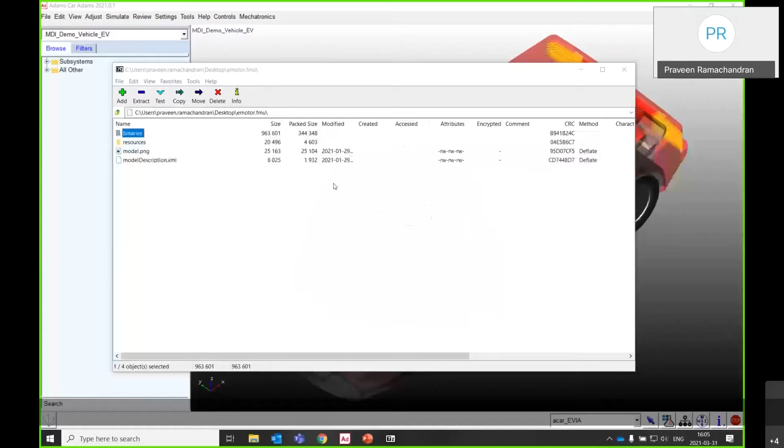My name is Praveen, and together with my colleague Alexis, we're going to take the first session of today's webinar. So we start with the introduction. I think the past couple of years, those of us who work with the automotive business hear a lot about electrification. A lot of new exciting car models have been released by our big automotive OEMs across the globe. People who have driven one of them know that it's really exciting to drive an electric vehicle, mainly because of its enthralling acceleration and the stability it gives because of its lower CG.

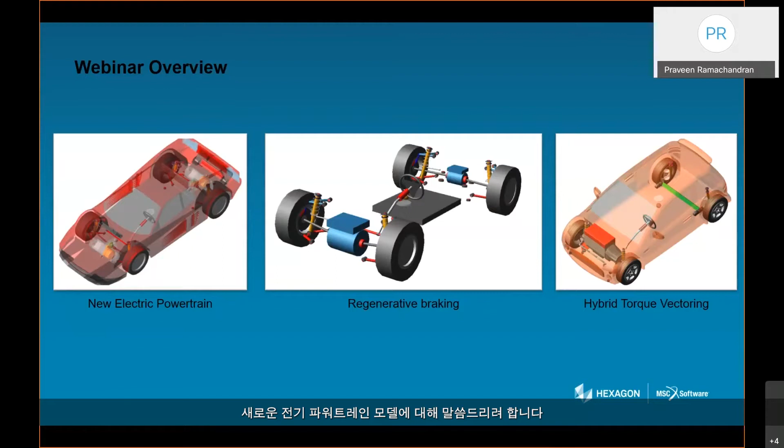Many of our customers are driving the electric revolution, and we decided to work on it, and we came up with a few examples that will be helpful in your day-to-day work. This is an overview. My colleagues, Manuel and Kent, will speak about some of the application side. But in the first session, we will speak about the new electric powertrain models which we designed in Adams, and in this session, my colleague and I will be taking over.

Hopefully you are all familiar with this first model, the typical Adams example assembly model. It uses an IC engine. The first question is, how do you convert this IC engine Adams model into an EV model? And the next question was about the EV model. When you convert it from an IC engine to an EV model, there can be many sources of power.

In an IC engine, there used to be one engine in the front, and then maybe you have four-wheel drive. You transfer the power using drive shafts to the four wheels, but you never have two engines. But in case of an electric motor, you can have two different motors, in the front and the rear. You can have four motors, like in a hub-wheel driven car, or it could be like a truck with many motors. So how to address it?

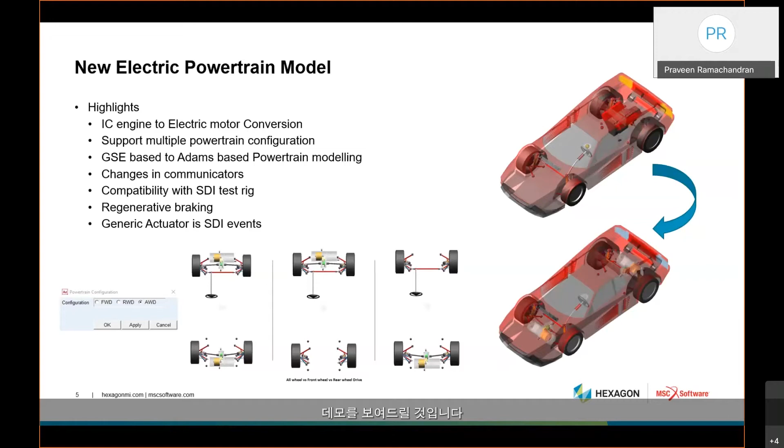Then we also will highlight how we converted from the traditional equation-based, the GSE-based powertrain modeling to a more Adams-based powertrain modeling. And we'll also highlight some of the changes we brought in the template, especially related to the communicators and the compatibility with the SDI test rig and so on. And then my colleague, Alexis, will speak a little bit about regenerative braking, and he will show how this can be demonstrated. So I will start directly with the demo.

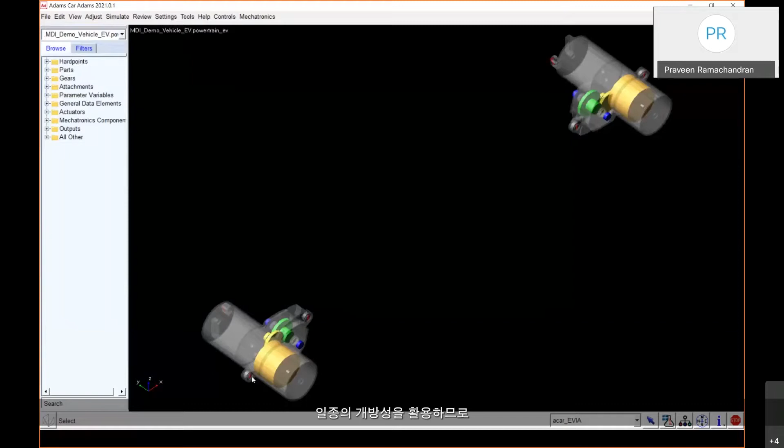So let's see. Yeah. So now you can see the familiar Adams assembly model. And what we are interested in is the EV powertrain. As you can see, there are two motors in the model. One drives the front and one drives the rear. And the first thing we are going to look at is the topology. Unlike the traditional GSE-based model, here everything is modeled using Adams components, which gives a kind of openness and makes it easier for our users to modify it.

So if we look at the front part, we have a housing which is attached to the subframe using bushings, which are like the engine mounts. We have a rotor part which represents the rotational mass and inertia. We have a two-stage gear reduction. You have the intermediate shaft and then the differential, which will be used to transfer the torque from the motor to the drive shaft, which is attached here on this side. And we are using couplers for gear reduction. So this is actually a really simple mechanical system.

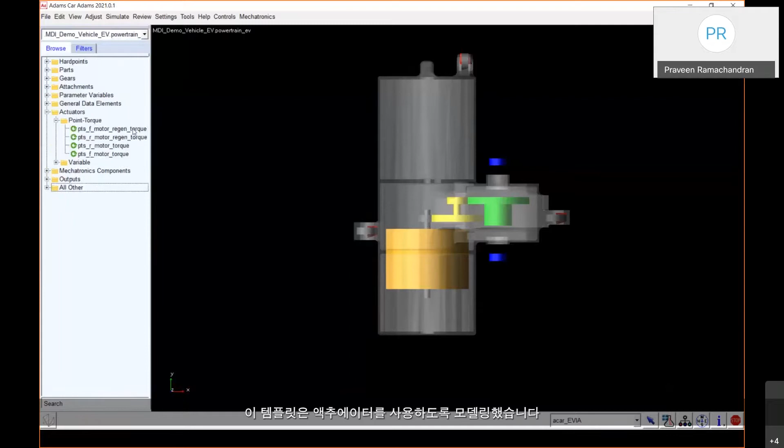What we have modeled in this template is that we are using actuators. The actuators act between the rotor part and the stator part. And we have two actuators, one representing the driving torque and the other one representing the regen torque. The driving torque and the regen torque are controlled using splines. So if you go here to the splines, you can see the splines used for these actuators.

The driving torque is a function of the throttle demand and the RPM, and the regen torque a function of brake demand and RPM. There could be other ways to model regen torque, which my colleagues Alexis and Manuel will explain. But in this simple case, it's just based on brake demand.

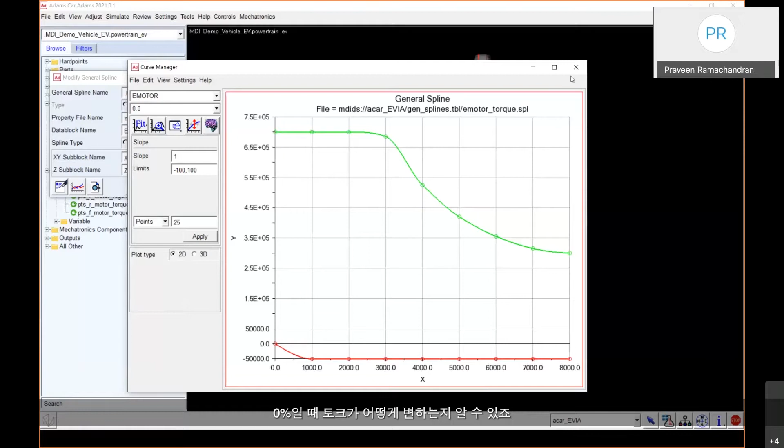So if we open one of the examples for the driving torque spline, you can see that this is really familiar. It's similar to an IC engine, but you can see how the torque varies across RPM for different values of throttle. When you have 100% throttle, how does the torque vary? And when you have 0%, how does the torque vary? So this is actually a really simple way of using splines to model an electric motor. We also have some variables called scale factors that can be used to scale up and down the amount of torque applied to the motor. So this is the first set of information.

Now, one of the interesting questions which our users used to have is how do we support this multiple powertrain configuration? Let's say right now it's an all-wheel drive system. If we want to convert this into a front-wheel driven car, how do we do it?

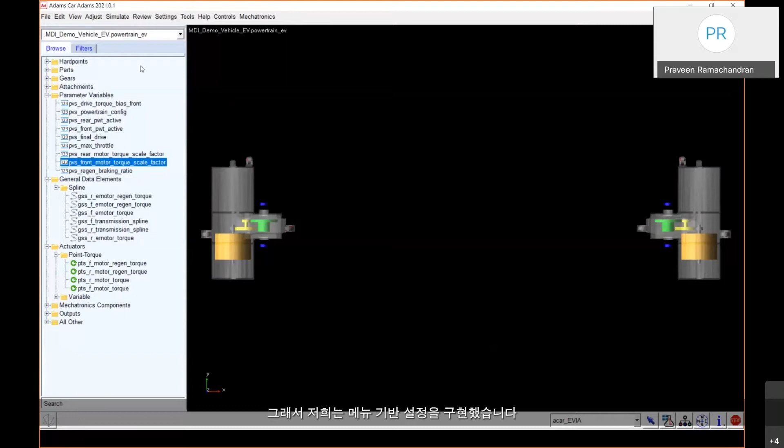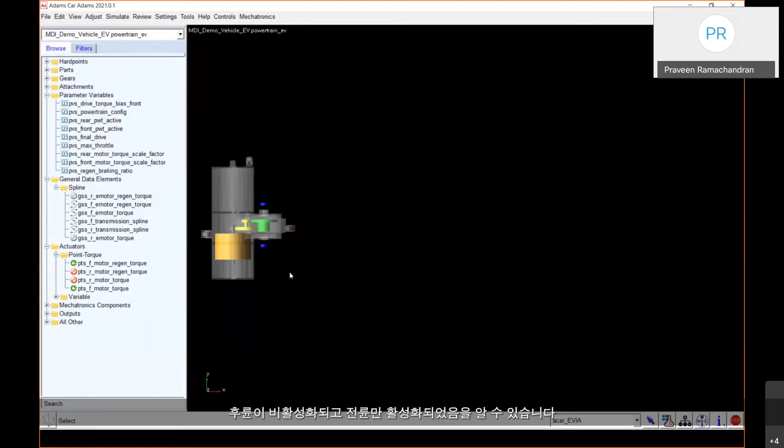So what we have done is we have implemented a menu-based setup for it. We go to the adjust menu, we go to powertrain configure, and when we change from all-wheel drive to front-wheel drive, we can see that the rear part is disabled and only the front part is active. So you can actually change your configuration from the standard interface.

So of course you can ask a question: is it just disabling and enabling the groups? Is that all? I would say no, because what is also changed with the help of this menu or the macro is that there are some communicators which communicate the properties of the powertrain to the SDI test rig, the standard driver interface test rig. So we are also changing these state variables in the background. So this is just for your information.

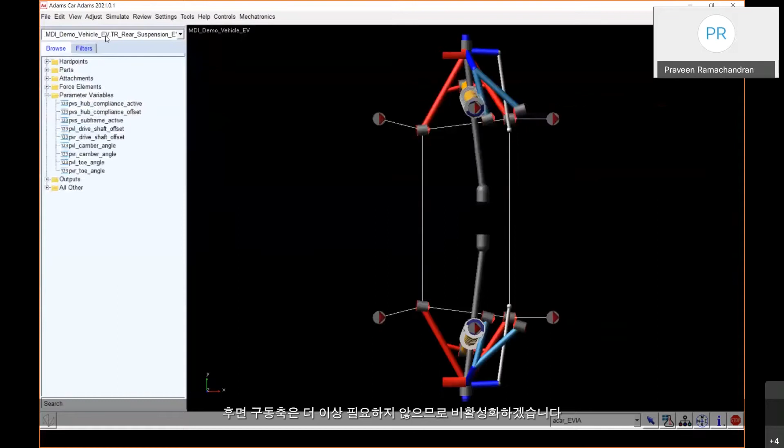So now we have a front wheel driven car, and as you can see, we don't need the rear drive shaft anymore. So let's disable that one as well. Let's go to driveline activity, inactive, and it's gone. Then we come here, and here we can do a standard acceleration analysis. So it's a front wheel driven.

You can see, we can do a closed loop throttle. So then you can do an acceleration analysis. I will not go through the analysis itself, but I will directly go to the results just to save some time.

So here is a short summary of what we explained. We have the torque, we have scale factors, we have the spline-based model, and the macro makes changes to the state variable. And you can see some of the results from it. Here we have a closed loop acceleration event with the EV model. The user wants to have around 0.5 G of acceleration from 1 second. You can see that it is doing that, and the speed of the vehicle is increasing accordingly.

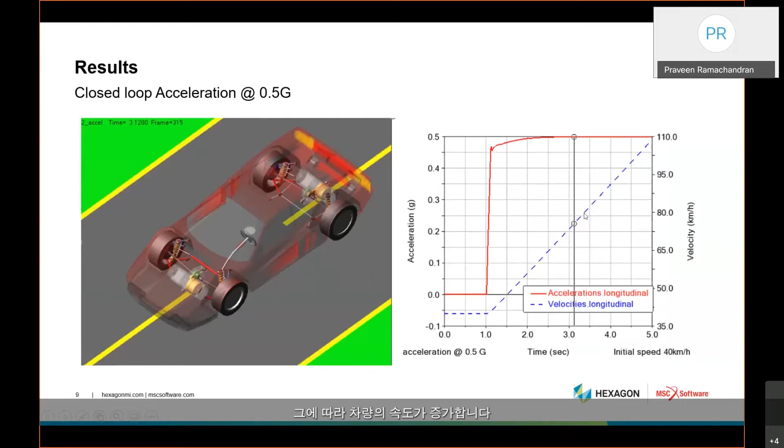This is an example where we compare acceleration for a front wheel driven versus rear wheel driven vehicle. The throttle demand is the same for both cases, but a rear wheel driven vehicle, as you can see in this picture, got better acceleration, resulting in a higher velocity because of the weight transfer to the rear. If you look at the drive wheels, for a rear wheel drive the normal force on the drive wheel is higher compared to a front wheel driven vehicle.

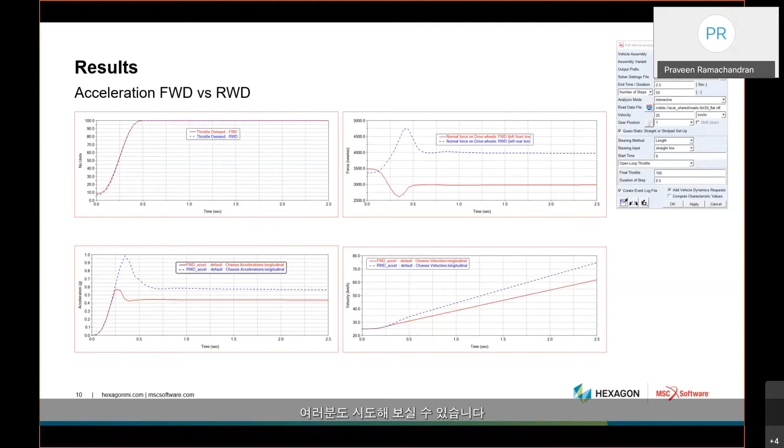So these are some of the kinds of simulations that you can do. This is compatible with most of the Adams standard analyses, and you can try this out. And of course, you can ask a question: you have created a macro, so do we need to add any additional setup file? Or if I decide to transfer this file to my colleague, do I need to send something more?

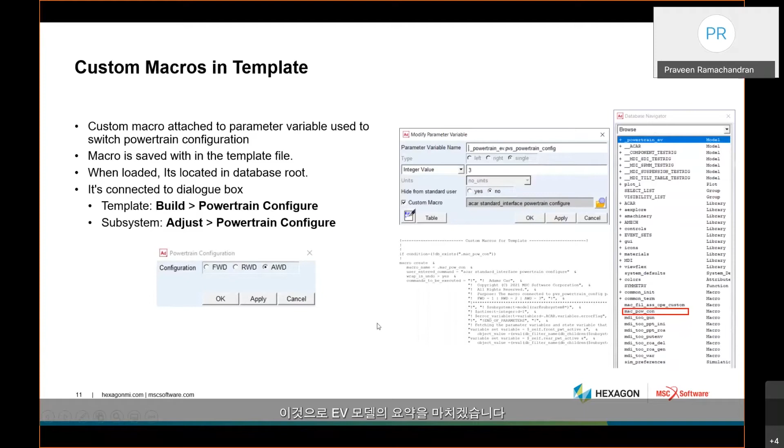Actually not. That's a good feature inside Adams, called the template macro. This macro is saved inside the template, and as you can see in this image, a screenshot from the template file itself, the macro is saved here inside the template, so you don't have to send any additional file. So it's very easy to use. If you're interested to see the macro, you can see it under the database navigator under macro mac_pow_con. So this is a short summary of the EV models.

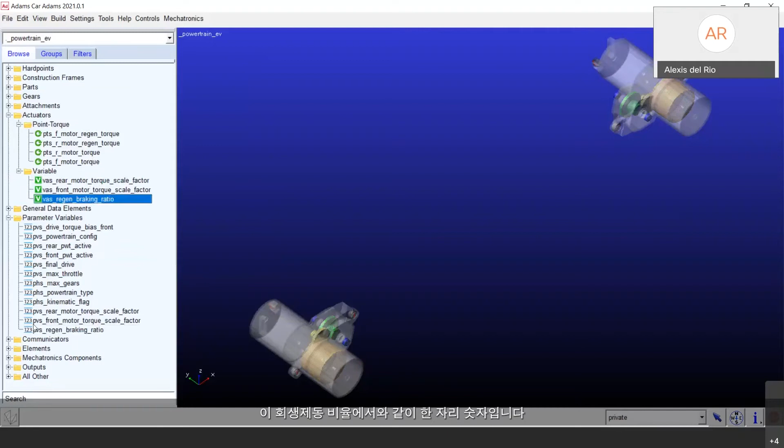But maybe if I show you the template, you will see it in a better way. The point torques, as explained, apply the torque to the vehicle. The variables collect the value of the parameter variable here, like this regenerative braking ratio, and it's a single figure. Then you also have your state variables, which give all the characteristics to the vehicle required to work. I could have set these actuator variables inside the system elements, but then they would not be tunable during the simulation. And that's the intention in this example.

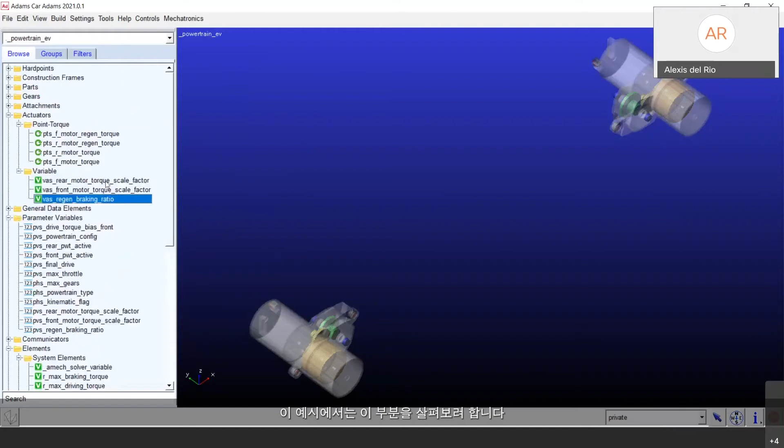We wanted to show you that you can do this, and the way to demonstrate is going back to the standard interface. There's two ways to run this. You could do a full vehicle analysis and do a file-driven event.

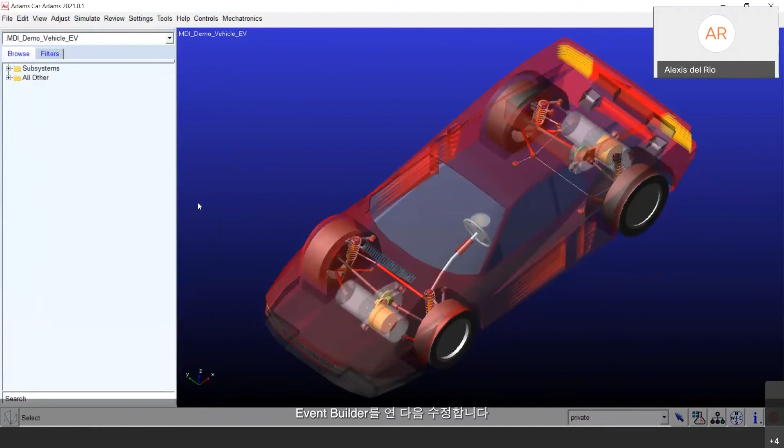And through here, you could press this button to open the event builder and then modify, or you could do it the other way around, going through event builder. You will have to set either a new or open an existing XML file, which will have all the characteristics of the vehicle. Once you are in the bottom side, in the actuators, you can generate one to make sure that your vehicle performs the variation.

So we can call it a braking regen. Then we add it, and from here you click in actuator, and you will have all the different actuator variables existing in this assembly.

So in this case, we can get into regen braking ratio, and then create expression. Create expressions such as a STEP5 of time, which will be simple enough to follow, and then say at time 1, my value is 1, and at 5 seconds, I want it to go either to 0.5, or I want it to disappear completely and switch it off.

Then from here, it's just a question of saving, and then saving and use. What you will come up with is, again, you will go into the file-driven event menu, with the exception that here you will have the XML pointing to the one that we did in the event builder, and then you go from there.

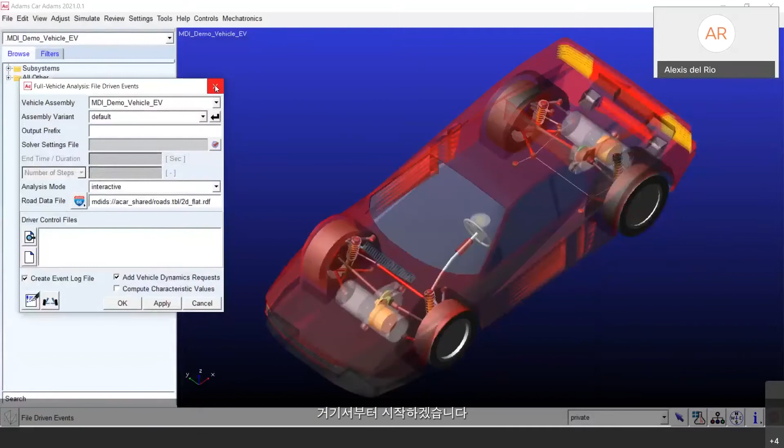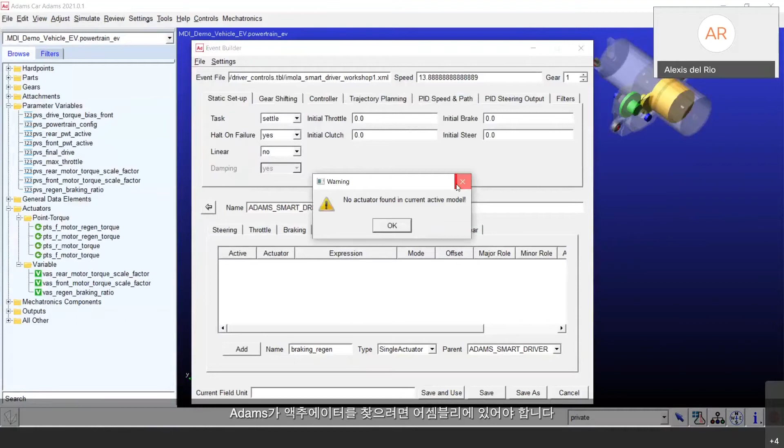Something to bear in mind, and this is important because it's a bit confusing. If I were to select the powertrain and then go into event builder and create this actuator, it will give me this warning. This only tells me that I need to be careful, and for Adams to really find out the list of actuators, I need to be in the assembly.

Another important thing to point out is that when you apply the actuation and the step 5 function as we've shown, the value in the variable, which is actually this parameter value, will be overwritten. So anything you have there will be gone during the simulation and will be applied according to what you have defined. That's something you need to be aware of, good to know upfront.

And that's everything from my side. Thank you.

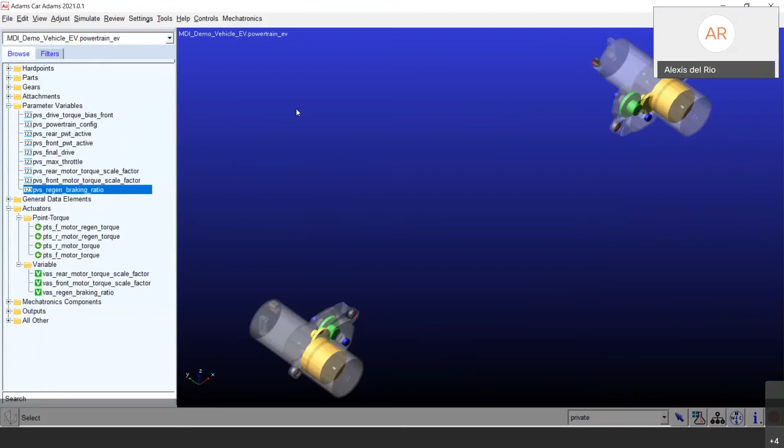All right, thanks, Alexis. So our next presenter is going to be Manuel Shen. Manuel, I'm going to pass you the ball. Hey, Hemant, sorry, Praveen, yes. I have, maybe I can present one more demo. Oh yeah, sure, go ahead. Sorry about that. Okay, could you please make me the presenter? Yeah, I can. Yeah, thank you. Give me just a second, Praveen. Yep. So I pass the presenter privileges to you, Praveen. Yeah, thanks, thank you, yeah.

Okay, so I will share one more demo model, and then I will let Manuel present the regenerative braking. So this demo is about integrating control system to an Adams model. Here in this example, we have a control system model for the electric motor as an FMU, and we are going to explore how to integrate this to an Adams model.

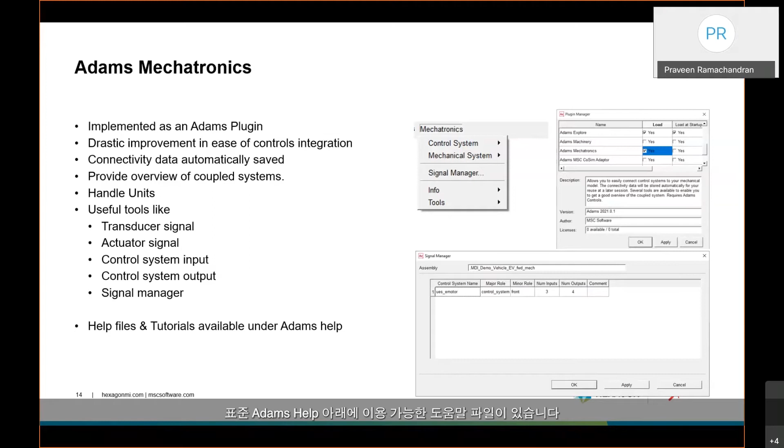It can provide you an overview of the coupled system, for example, the e-motor, what are the connections, that's displayed easily. One of my favorite things is that it can handle units. So if it's a torque, whether it's a conversion from Newton meter to Newton millimeters, Adams mechatronics can handle it. It has tools like transducer signals, actuators, control system input and output that help do these operations. If you're interested to learn more about Adams mechatronics, there is a help file available under Adams help, standard Adams help, so please take a look at it.

The second technical term I used is the word FMI, Functional Mockup Interface Standard. It's nothing but a common standard to exchange data. It is supported by 150 plus tools. You can find these details on the website FMI. So it's basically a common way of sharing data between different softwares.

And of course, Adams supports it. We decided to use FMI for this particular example because we want our workflows to be independent of control software. So you could use MATLAB Simulink or Easy5 or any other software, but if your software supports FMI, this workflow would be directly applicable to your case.

One final point about FMI is the licensing. Do I need an additional license to run an FMU? That is actually set by the vendors. For example, if you are using an FMU generated from Simulink, it's actually MATLAB who decides if you need a license or not. In case of our tools, if you use an Easy5 co-simulation FMU, you don't need any additional license, it's included in the FMU. But if you are using an Adams FMU, then you need a license. So it's different across different vendors, and it's your choice.

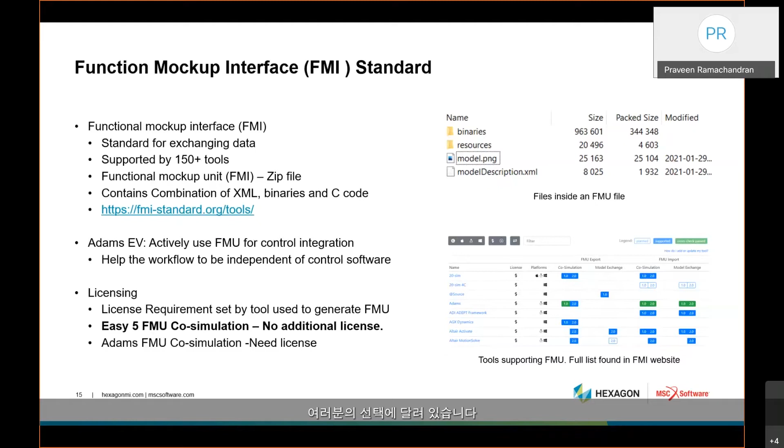Now coming to the flow chart. What we are planning to do is we have an FMU model of the electric motor, and we would like to integrate it with our existing powertrain template. In our powertrain template, we have a front motor and a rear motor, and we have to find out the correct value of the torque. For example, what is the driving torque that is going to be applied by this e-motor, and that is calculated by the FMU, which is on the right side.

So what we are going to do is first create a template where we integrate the FMU inside an Adams template as a control system. Then we will import this template into an existing assembly. When we import it, this powertrain EV template will take the value from this e-motor controls subsystem. A little bit complicated when I explain it, but maybe I can show you in a demo how this could be done.

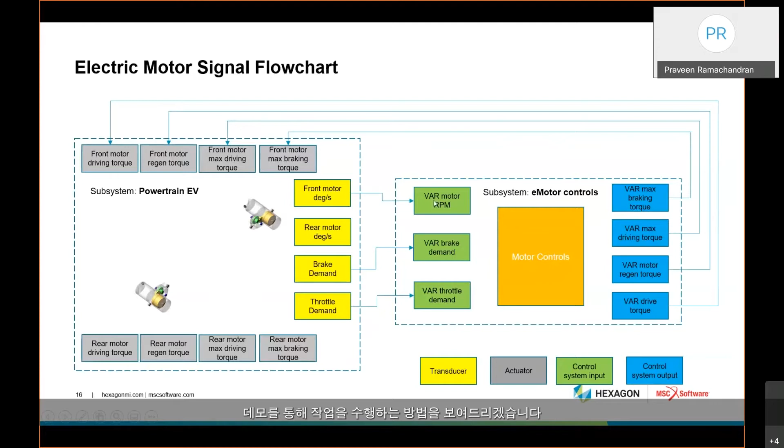So we go to the assembly here. This is a standard Adams assembly, an EV template. It's a four wheel driven car, and what I have as a user in my hand is an FMU. So what I have is a file which looks like this, an e-motor FMU. If you open this file, you will find some files like model description, some binary files - a DLL file for the Windows version and an SO file for the Linux version. This is the file that I received maybe from the control system engineer.

What I do as a first step is go to the template builder, and I will integrate this FMU as a control system. For this webinar, for sake of time, I'm not going to explain how to do this, but you can watch it in the online training materials.

So what we have done is integrated this FMU in a separate template, called e-motor controls. Then you can see the corresponding inputs and outputs: there is the input signal, throttle demand, brake demand, and motor RPM. The outputs are the torque values - the driving torque and regen torque, which is used by the actuators. Then there is the max driving torque and max braking torque, which is used by the SDI test rig. So this is how it looks like.

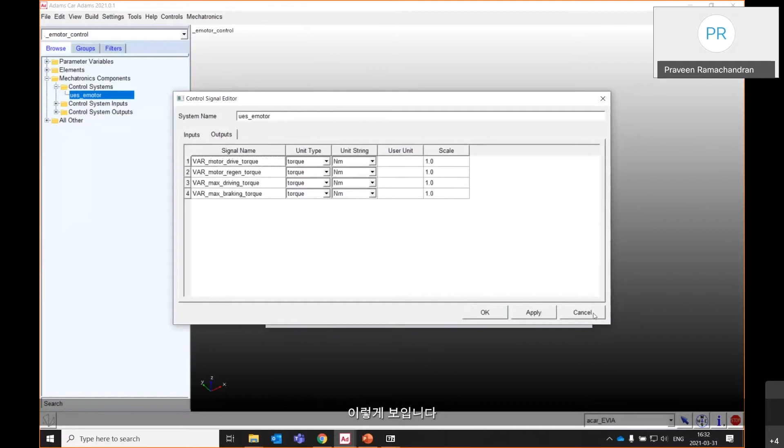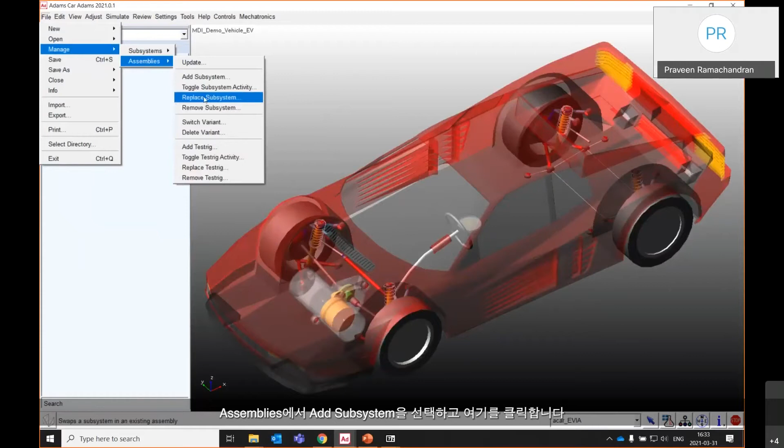Now what I do is go back to the assembly, and here in this model right now it is based on the spline. What we will do is import this new e-motor controls subsystem into this assembly. We go to assemblies and say add subsystem, and click here. We add e-motor controls. So now this particular control subsystem is part of the assembly. Due to the way the assembly is modeled, now the motor will take the value from the FMU instead of the spline. So now this model is controlled by the FMU.

You can actually see or get a visual picture of how these controls are connected. If you go to the mechatronics plugin and click on the signal manager, press OK, you can see the control system present here, and how the connections are done. If you look at the input channel, you can see the throttle demand is connected to the throttle demand, brake to the brake, and so on. If you go to the output, you can see there are some output ports, but it's not connected. I'll show you how to connect it, and you can see how easy it is. There is something called motor drive torque.

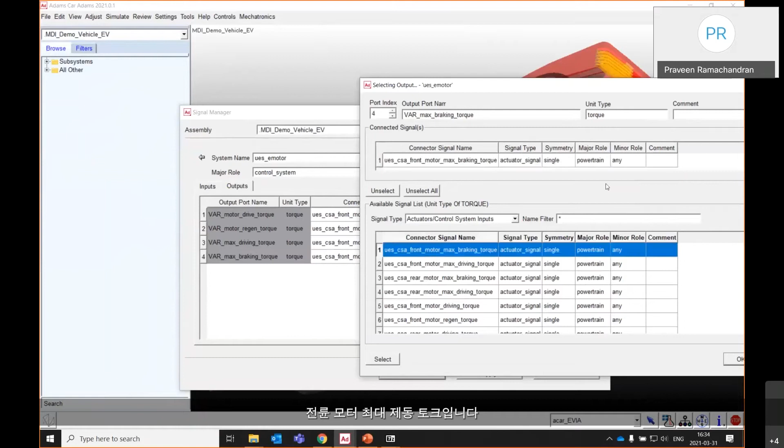So you double click here, and since we are only working with front wheel drive, you can select front motor driving torque. This is selected. Next one is motor regen torque, so it's front motor regen torque. Max driving torque should be front motor max driving torque. Front motor max braking torque. So you can double click and do the connections, and you can see the output channels are connected to the right signals. Then you press OK.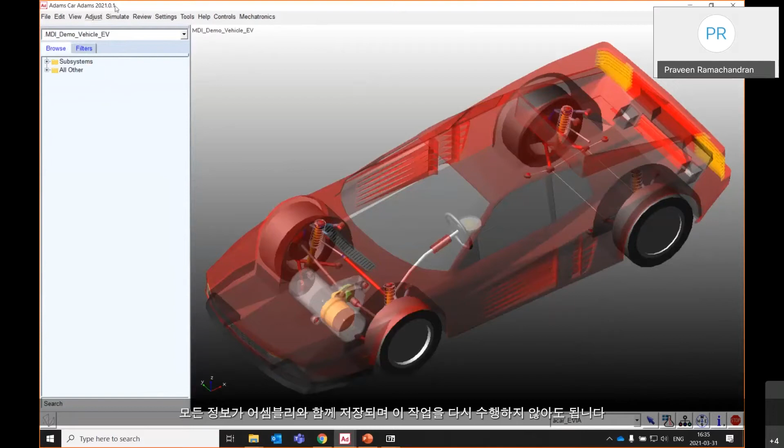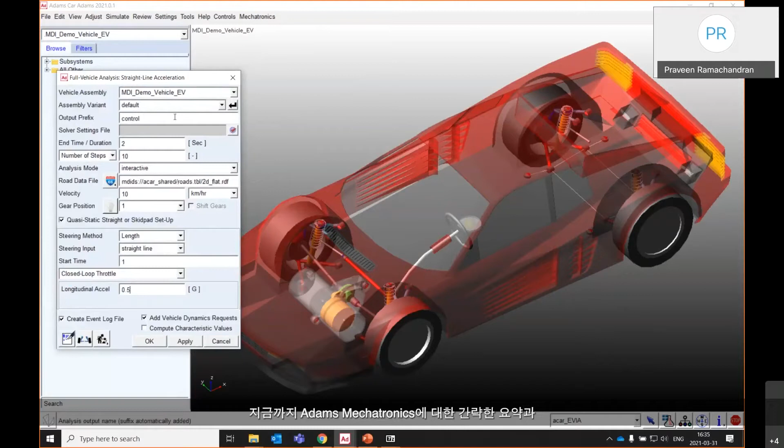All the information, all the signal connections are done. When you save this assembly, all this information is saved with the assembly, and you don't have to redo this. What you can do is directly go to the standard events, let's say an acceleration event similarly, and you can just perform this event without much work, just like the previous one. So you press this, and then you get the result. That's a short summary regarding Adams mechatronics and integrating a mechatronics model into it.

One of the things I liked about this system is how mechatronics handles the control system. What is good is that it saves all the necessary files for the control system within the database. This is the database, and it saves it under external system libraries. Here you can find the FMU, the ESL file, and all the necessary files. So it's actually quite a neat way of integrating the control system as well. That's a short summary of integrating the control system. I hope you try this out, and hopefully it will make your life easier.

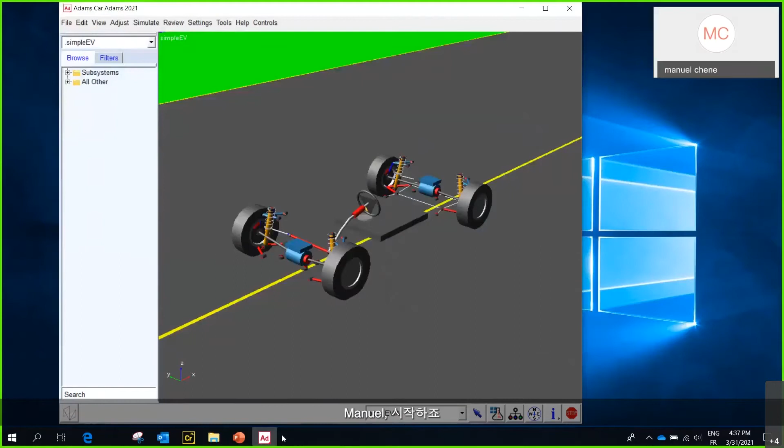Yeah, okay. You should be able to, yep, so I see your screen. Yep, looks good, Manuel. Okay, this one.

Okay, so I'm presenting now the regenerative braking scenario you will find in the workshop, in the asset. This scenario is using three EASY5 control systems working together and communicating some kind of information. I will explain how this is working, how the three systems are working together.

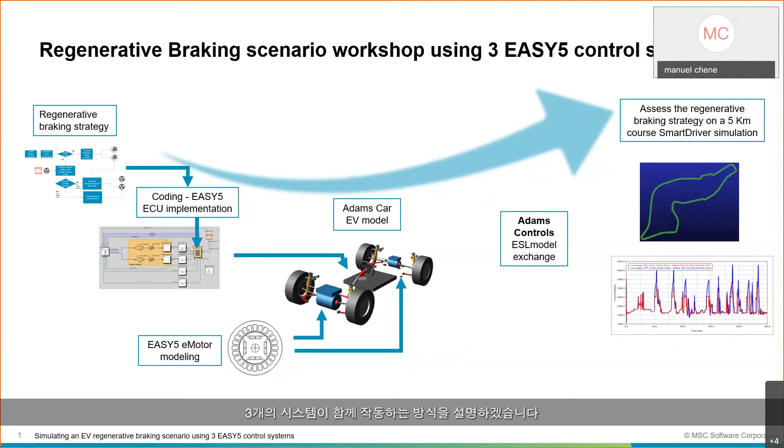Before that, I must give some technical details about the co-simulation, what we call co-simulation, because the example we show here is using Adams control, so-called external system library mode. I'll explain what exactly this is. So the standard and usual discrete co-simulation, as explained here, uses two solvers, solver A and solver B, and each solver takes care of a set of equations, maybe mechanical equations and electrical equations, for example. The two solvers work together and communicate in discrete steps, and this leads to a loose coupling simulation, in fact.

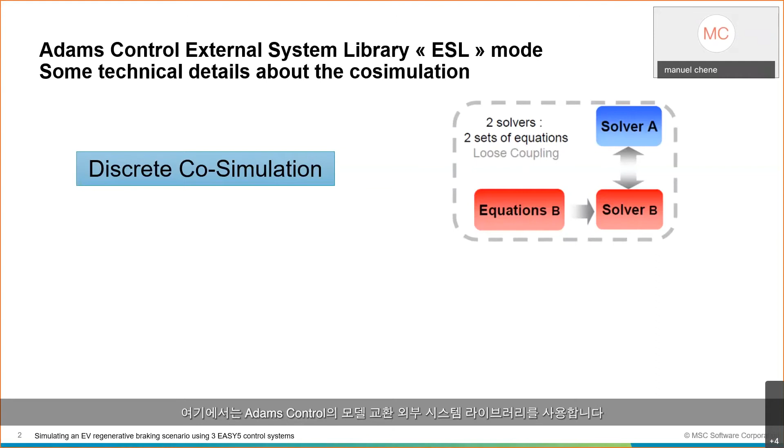So it's usually quite slow as co-simulation. What we are using here is what we call model exchange, external system library in Adams control. In this case, the solver A, which is Adams solver, is taking care of integrating the equations of solver B, which are typically the electrical equations in this case. Here we have a single solver and a coupled set of equations, so you have a tight coupling. This is achieved by using what we call in Adams the general state equation, which is a set of non-linear differential equations in Adams, and this is very equivalent to the FMI model exchange mode, if you know it.

So some insight about the organization of the model and the subsystems. In the model we are using here, we have a full vehicle model with specifically modified subsystems and templates. We have a new template on the left, which is the ECU template and subsystem. This model embeds the ECU subsystem and control system, which takes care of the braking and acceleration strategy, and also a very simplified inverter and battery management. We also have a powertrain subsystem with two powertrains, for the front and for the rear. Typically here we have three control systems working together: one for the ECU, one for the front electric motor, and one for the rear electric motor.

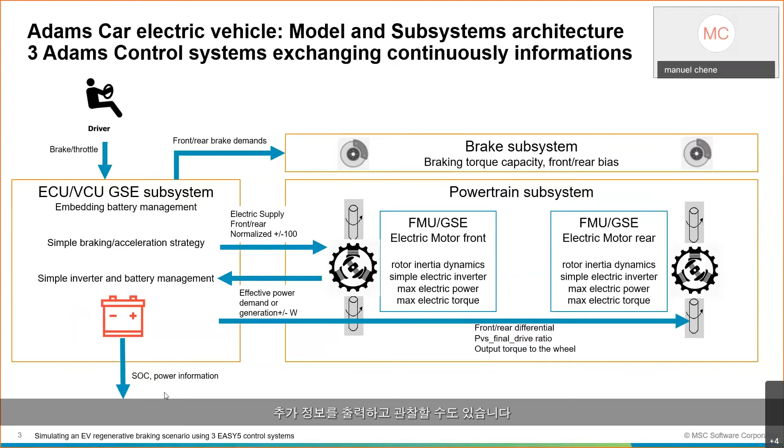Upon all this information, it's computing back the electrical command to the front and to the rear motor. And if necessary, and I will show you in the next slide, it's issuing some front and rear brake demand for the mechanical brake. I will explain how we're splitting between electrical brake and mechanical brake. And at the end, optionally, we can also output and observe some state of charge and power information about the battery status.

One insight about the regenerative braking strategy we have embedded in the ECU and VCU code. At the beginning, the ECU is observing the information coming from the electric motor and from the battery status. It is computing at any time the maximum electric torque available, the braking torque capacity that the electric motor can generate. It compares it to the brake demand at any time.

If we are braking, typically, with a low brake demand, 100% of the braking capacity can be generated by the electric brake, so we are braking purely electric. But if we are braking harder, the system automatically activates the mechanical brake along with the electric brake.

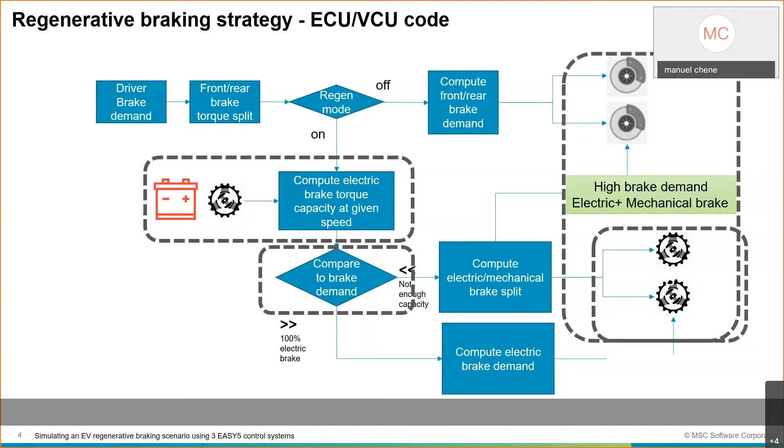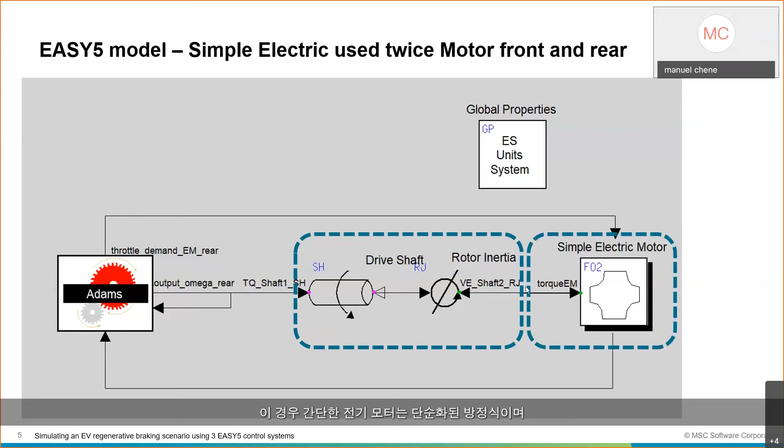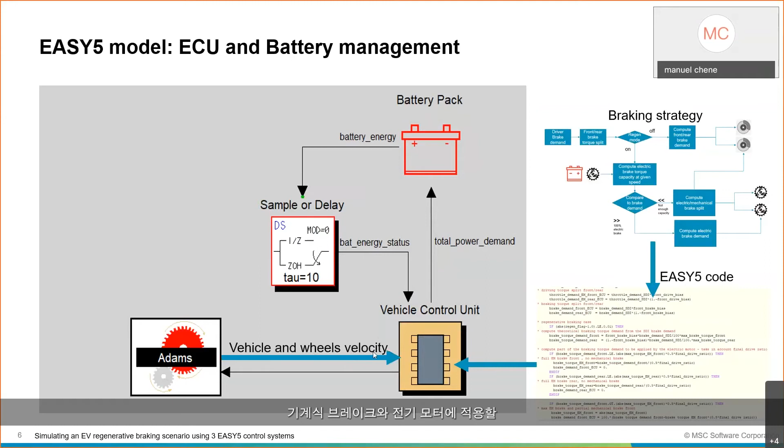Some words about the ECU and the battery management in EASY5. In this model, we have translated the braking strategy I explained some slides before into EASY5 code, and this code is embedded into the vehicle control unit. This vehicle control unit gets the vehicle and wheel velocity from the Adams model and computes back the throttle and brake demand to be applied to the mechanical brake and to the electric motor. At the same time, this model takes care of simple battery management, charging and discharging the battery.

Also note a very interesting feature in the EASY5 modeling software: we can simulate sample and delay in the model, so we can simulate sampled numerical and computer systems in the model, and the effect of the sample and delay.

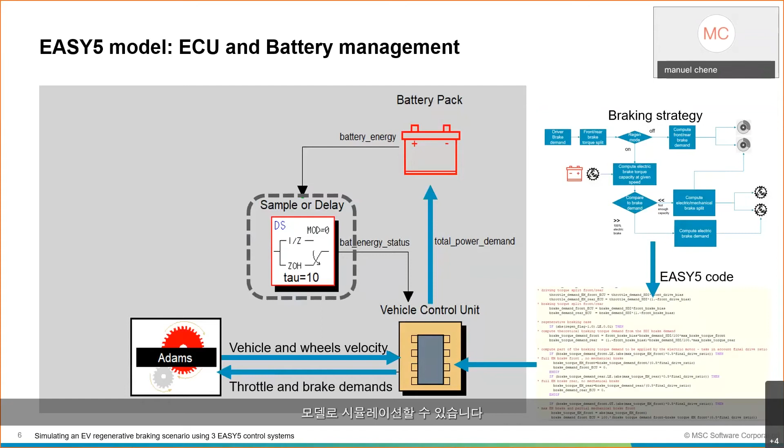During the workshop, you will be able to run this model. This is a simple EV model. You will find it in the Car database. Here you see the three components embedding the three control systems: the front motor, the rear motor, and the ECU.

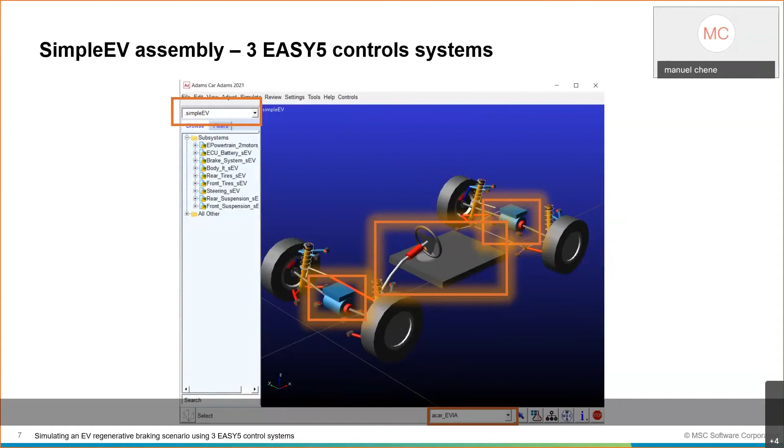Another result we can check during the workshop is the electric motor and mechanical brake demand. Here you see the brake ramp event start at 30 seconds. And until 32 or 33 seconds, you see that we ramp up the electrical demand, which is negative in this case. Negative electric demand means that we are applying a braking torque. Positive demand means that we are driving, accelerating.

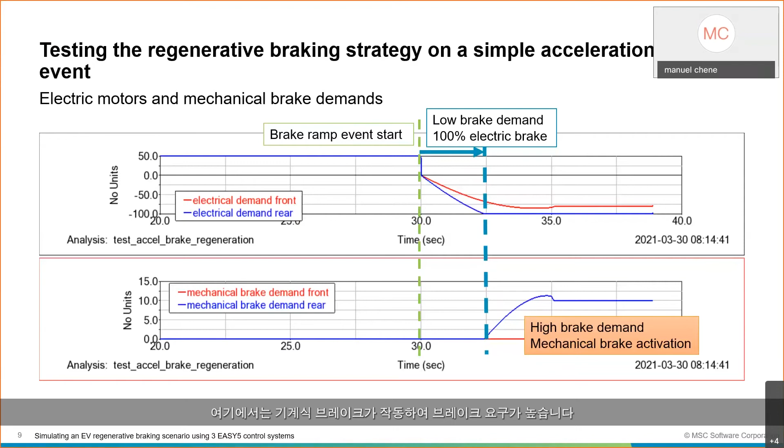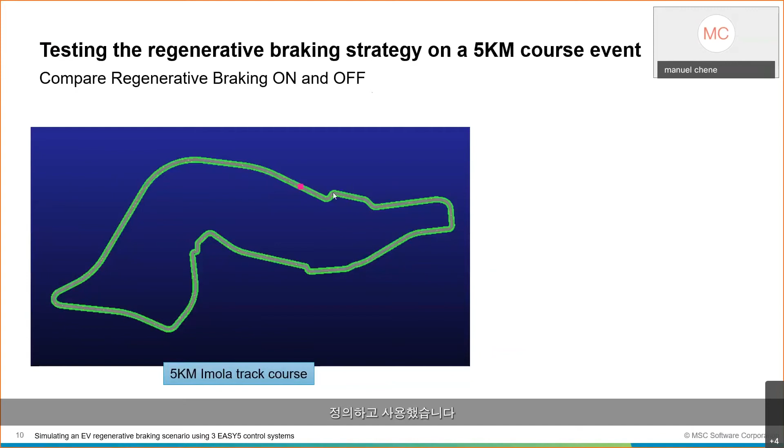And the last test simulation we do with this model during the workshop is to compare the regenerative braking on and off function on a longer course. So we have used the 5-kilometer Imola track course you see here on the screen. Here you see the velocity profile obtained by using a smart driver pilot for this model.

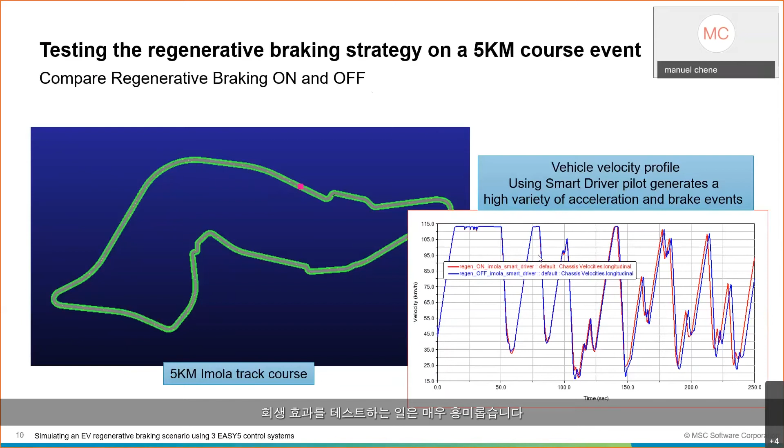The smart driver pilot is quite interesting because it allows to drive the model with a high variety of acceleration and brake events. So here you see acceleration, reach the maximum, and then we are braking because we are reaching the curve, traveling through the curve. So this deceleration here means that we are around this point here, to travel from this point to this point, and so on. So this is quite interesting to test the regenerative effect.

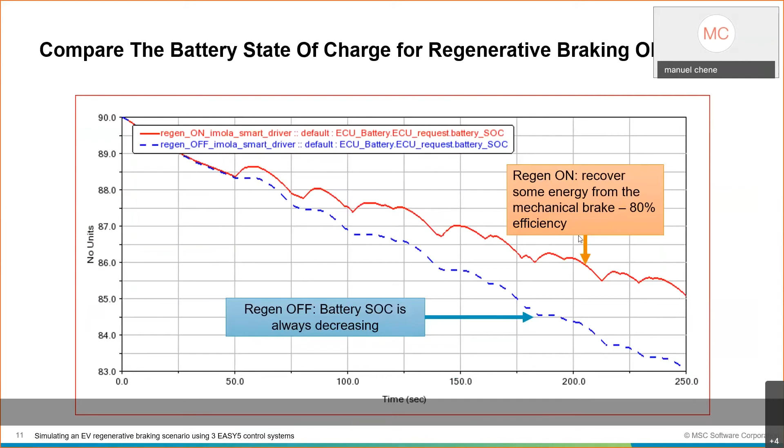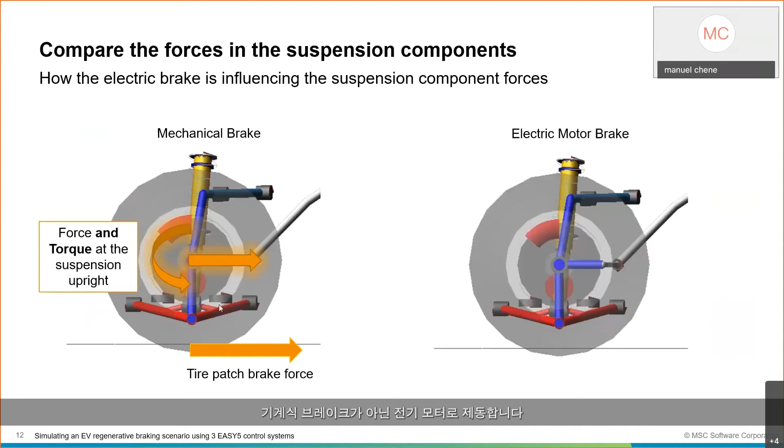But in case you are using electric motor braking, you are not braking with the mechanical brake, but with the electric motor. In this case, if you apply the same brake force at the tire patch, then you have only a force, the same force at the suspension upright at the wheel center. And at the same time, the brake torque is not transferred at this point, but directly to the electric motor suspension bushings by the transmission shaft. So you see that the effect of the mechanical brake and the electric brake is not the same on the suspension.

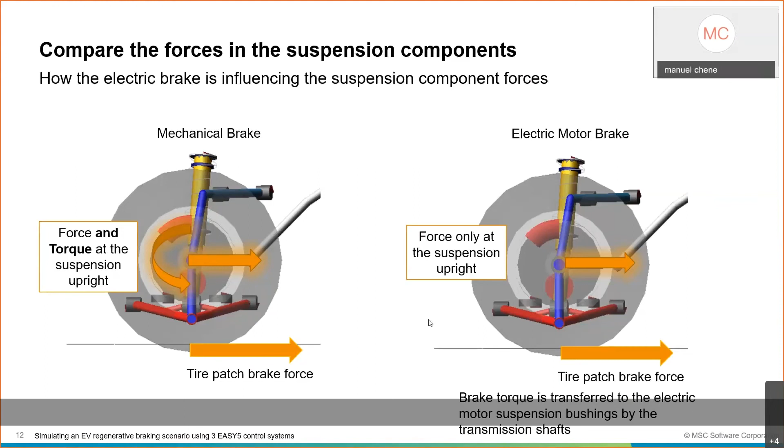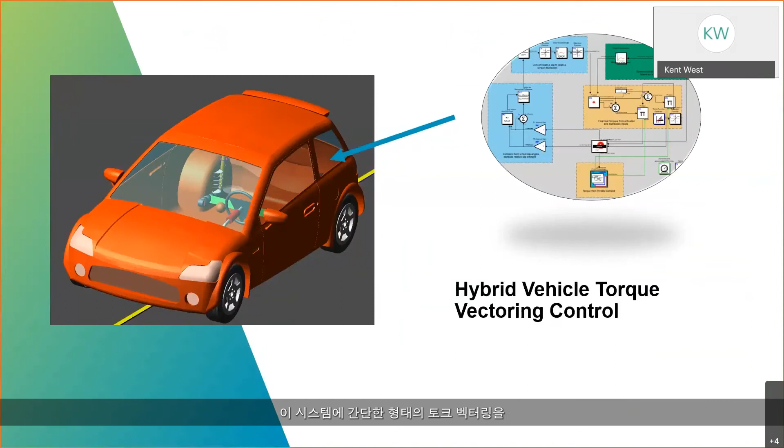So again, my name's Kent, and I'm going to talk briefly about the final example that we've got here, which is integrating a control system into an existing vehicle. And in particular, we're going to create a simple hybrid vehicle, and we're going to implement a simple form of torque vectoring on this system.

So just in terms of background, if I could get my slide to advance, really quick background about vehicle simulations with Adams Car. Typically, engineers would be using Adams Car for suspension analyses, and you're determining some handling characteristics of a vehicle. You might then, once you've got the handling dialed in, want to look at ride characteristics, and then eventually noise, vibration, harshness, and durability considerations.

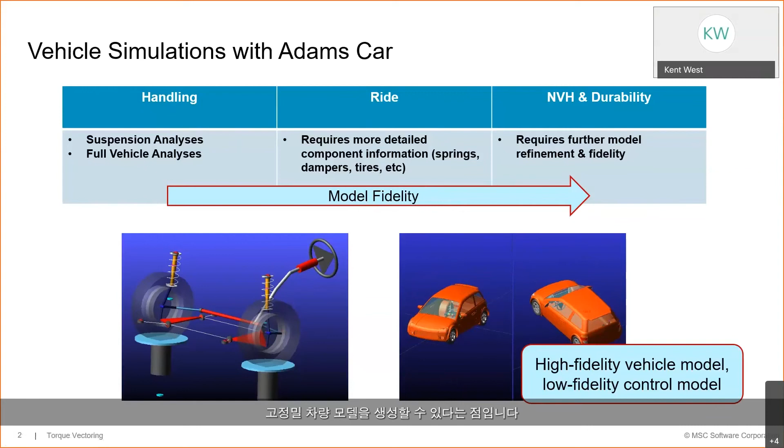As you need to do more of these different types of simulations, typically the model fidelity increases. So you need a more detailed model description in order to do these other analyses. And so a typical thing that we see with Adams Car is that you can create quite a high fidelity vehicle model, but having a low fidelity controller model is quite typical.

So in this new day and age, driver assist systems, or advanced driver assistance systems, ADAS systems, are more and more pervasive. But if I step back and look at what driver assist systems are, I think everyone understands what these are. They're used to improve the vehicle characteristics for things like ABS, traction control, and electronic stability control.

So typically engineers want to characterize the basic vehicle subsystem though, and the driver assist systems are employed after the fact in order to improve the vehicle response. So once again, you typically have a high fidelity vehicle model in Adams Car and a low fidelity control system.

So why do we want to create a high fidelity combined system? I think everyone's probably seen these things before, right? You want to validate the assumptions about simplified components that you've used previously. So if you had a really simple control system that was modeled in your vehicle simulations, maybe you want to combine the two together and validate those assumptions. In doing that, you can hopefully discover interactions between the two systems.

And as well, with newer systems, there's many more sensors and sources of information. So there's more and more reason to do these high fidelity combined systems. And so obviously, if you have a high fidelity combined system, it's possible to get greater confidence in prediction. So that's what this model does.

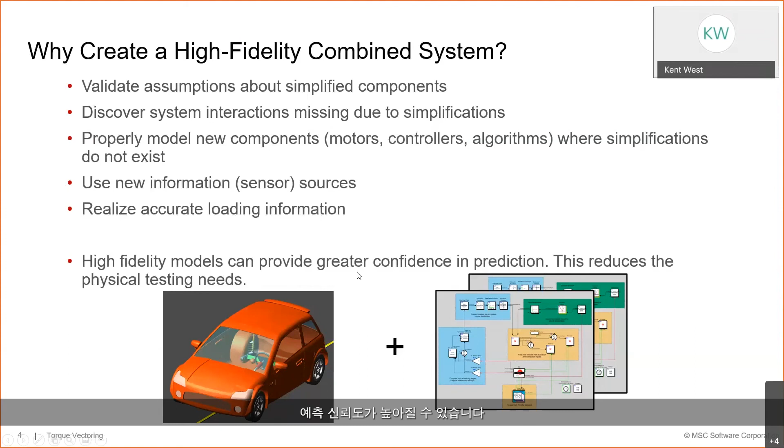So this is the final example that we'll talk about today. And this is the standard front-wheel drive subcompact vehicle demo model that comes with your Adams Car installation. So it's front engine, front wheel drive, and it's a typical internal combustion engine.

So what we're doing in this system is we're saying, okay, we're going to take the system as it is, but we're going to add an electric motor at the rear. We'll assume this is either 2 electric motors, 1 at each wheel, or 1 electric motor in the middle with a drivetrain that can shuttle the torque from side to side.

But we're going to assume that we can add torque at the rear wheels, and this particular model does not have a detailed electric motor. It's just a simple torque application. There's no regeneration, no motor dynamics. But what we're looking at is if you add these torques at the rear wheels, how does it influence the handling behavior of the system?

So this would be similar to a torque vectoring system that you might see in a typical car. And as manufacturers have more flexibility to put electric motors in the front and the rear in different locations, these kinds of systems are certainly easier to implement.

So in this particular example, I'm going to cheat a little bit, and I'll show you in a moment how it works. But basically, there's going to be a constant drive to the front wheels from the internal combustion engine. And what I'm going to do is sense what the slip is in the front wheels. And so this is perhaps not realistic. In a real system, a torque vectoring system would typically look at the vehicle yaw rate, maybe the lateral acceleration and the steering demand, and those would all determine how active this control system should be.

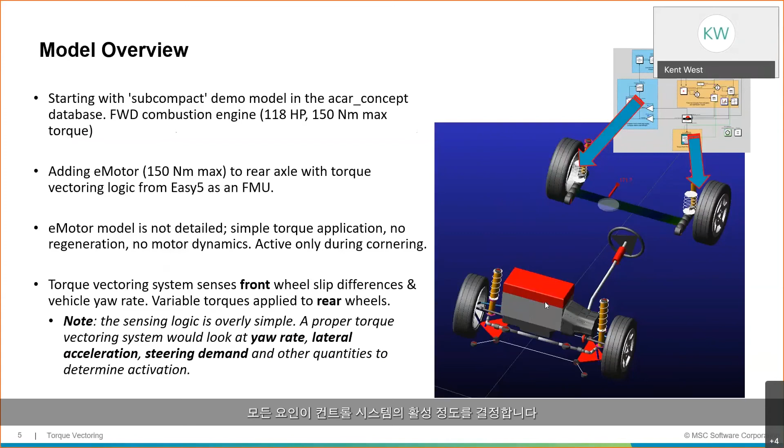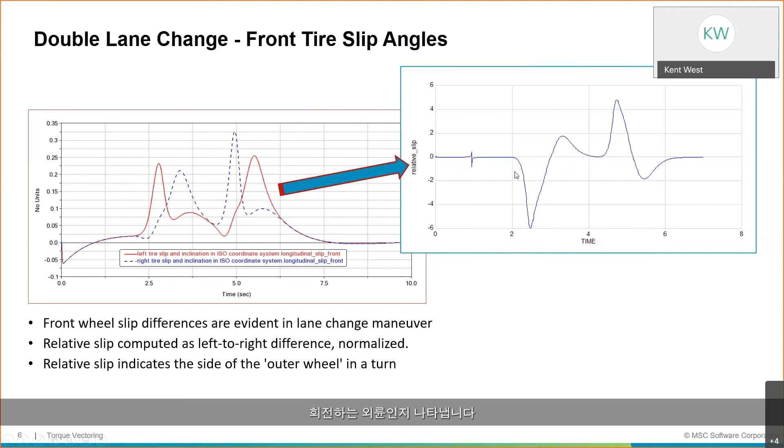And so what the control system is going to do in this case, and the control system is modeled in Easy5, I'll show you that in just a moment, is take a look at this relative slip, and based on the relative slip in these front wheels, it's going to apply correcting torques in the rear wheels, because this is where the electric motor system is. And so the electric motor in this case is just used as a boost torque to either enhance acceleration or enhance handling.

So in this example, the vehicle's turning left. So again, these front wheels have this constant torque from the internal combustion engine. And in this case, the right wheel is the outer wheel in the turn, so it's spinning faster than the inner wheel. And so if I plot this relative slip, you can see in this case, during the left turn, this relative slip curve comes down and it looks like this.

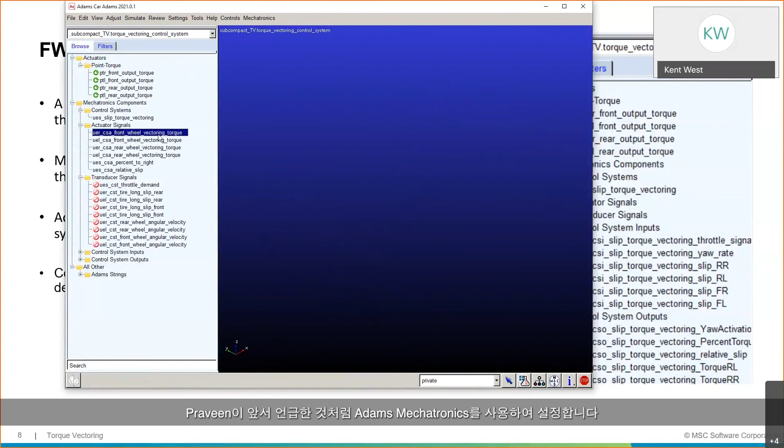And as Praveen mentioned earlier, we used Adams Mechatronics to set this up. And the reason we did that was so it's fairly easy to swap in and out different FMUs that control all these inputs and outputs. But basically, these actuator signals are passed into these torques. These torques act right at the wheel location.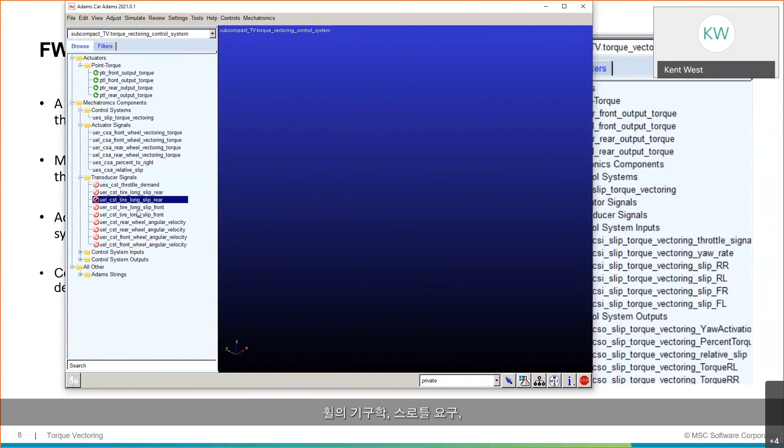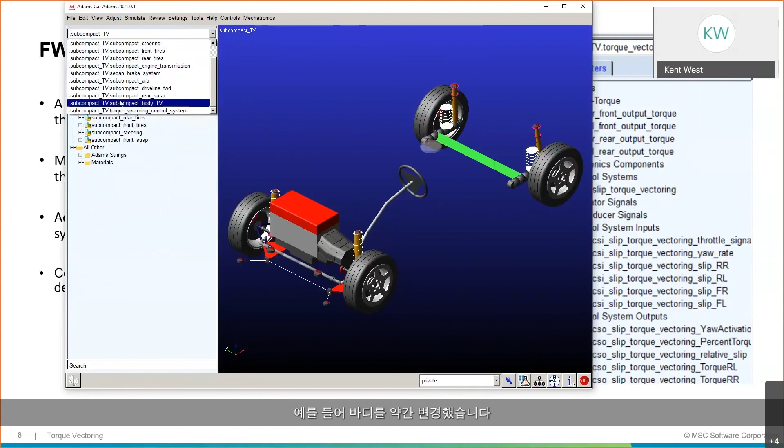Similarly, there's some outputs from the system. They're called transducer signals. And so things like kinematics of the wheel, throttle demand, lateral acceleration, yaw rate, all those kinds of things would be passed out to the control system. So the modifications to this subcompact model were fairly straightforward. Again, we added a new subsystem in here, and we made some changes to the body, for example. So the body simply has a transducer signal in it.

And finally, I'll switch back to this one more time. Sorry to switch back and forth so much. But the thing that actually does the work is this control system element here.

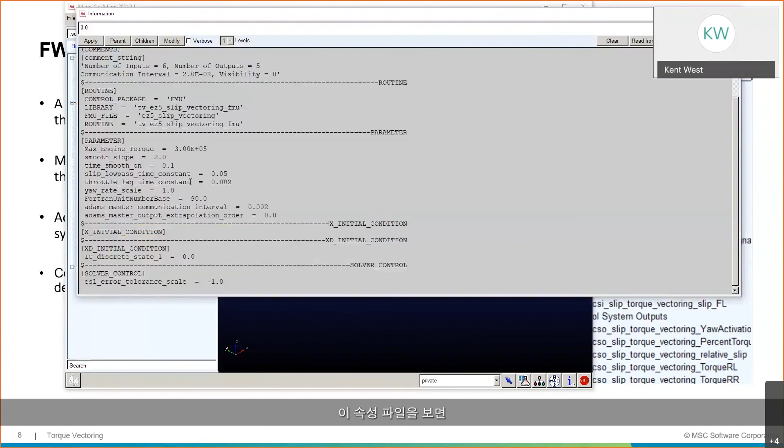And this guy is what is the interface between the Adams model and an FMU that represents the EZ5 system. I'll show you the EZ5 system in just a moment, but basically you can specify a property file here that talks about where the FMU is. If I look at this property file, you can see that this property file has things like, okay, what's the FMU file that was used?

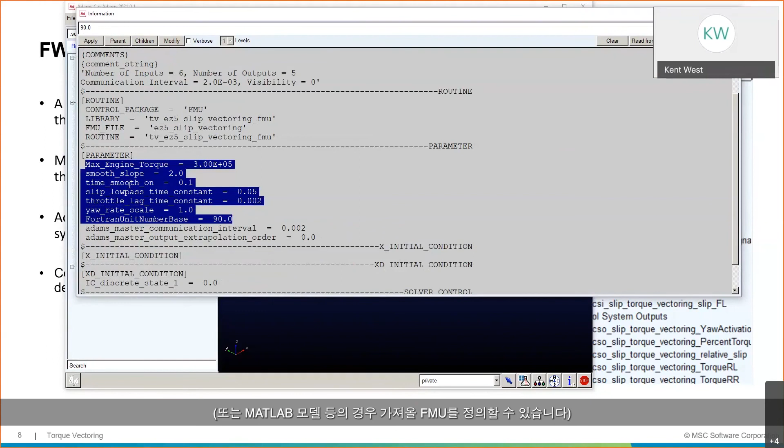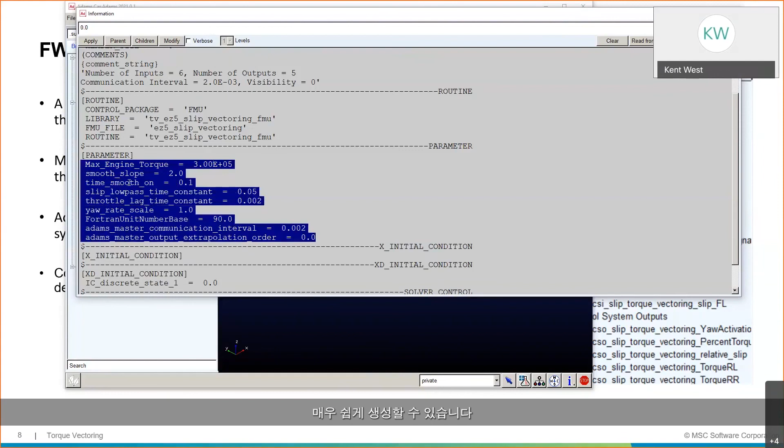There's also parameters in here which are quite interesting. So when I build the system in EZ5, which I'll show in just a moment, you can define parameters in the EZ5 model or the, say, MATLAB model or MapleSim model, whatever it is, the FMU that's coming in, it can have parameters that can be changed. And so these are the parameters that can be changed. So in the car interface, you can see it's fairly easy to create a property file with different parameters in here. And that's what I've done for this case here.

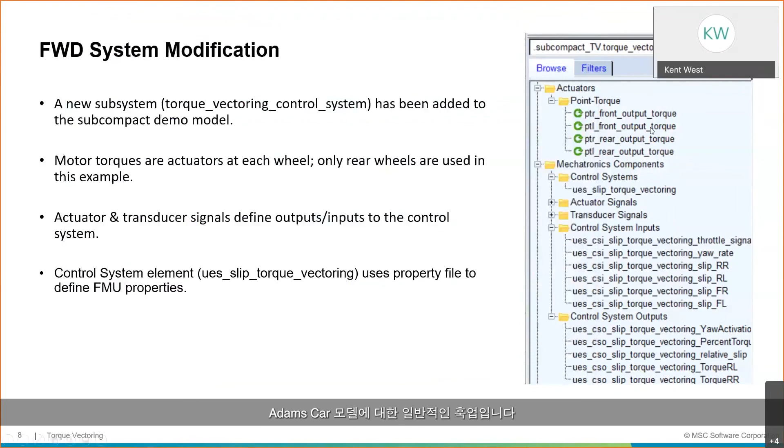So in the database, you can see that there's the standard property file, and then there's another property file called 2x. I'll show some results in just a moment, but it's basically the same information, and I've multiplied some things by quite a bit to see how the system responds. So it's nice that this Adams Mechatronics encapsulates this interface and allows you to set up these property files. So that's quite nice. So that's the general hookup to the Adams Car model.

As Praveen had mentioned previously, when you've got signals in Mechatronics, it's quite easy to manage them and inspect them. I won't talk too much about this, but I just wanted to point out that what Mechatronics does in the background for you is it manages these signals, and it connects this input to this torque element, this output to this output of the control system, and so on.

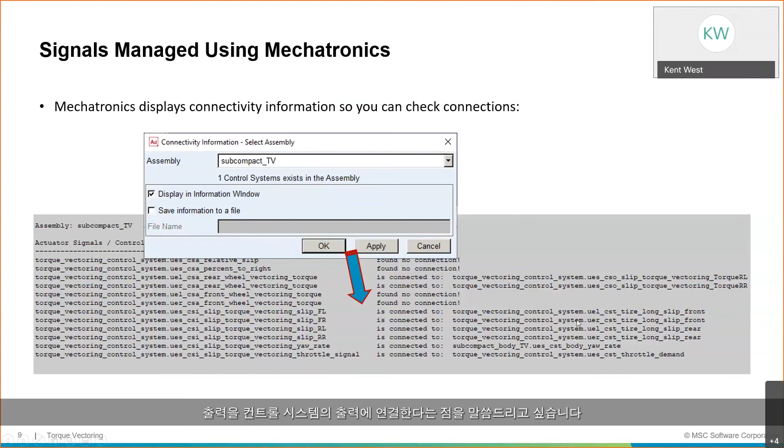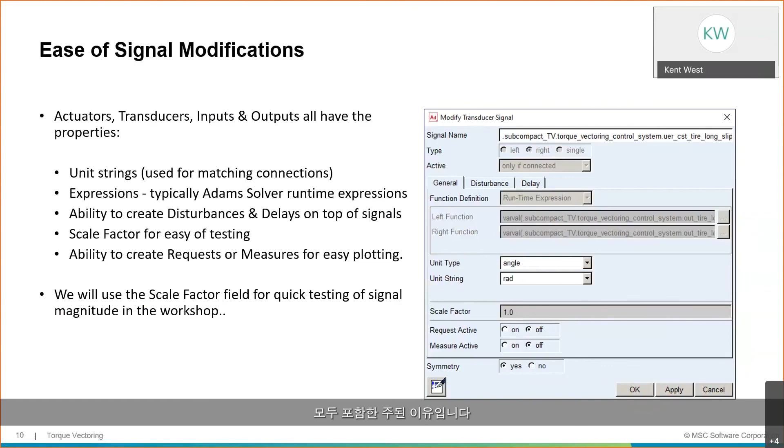Once you've got these things set up as signals with Adams Mechatronics, it's fairly easy then, if you want to do a study and you want to say, what if I increase the magnitude? What if I scale the magnitude of one of these signals? It's fairly easy to put a scale factor in and then just rerun your study. Or maybe you've got some disturbances that are happening on the line, or some delays. You can easily model these using these signals that are in Adams Mechatronics. So that's the main reason that the system has all these Adams Mechatronics components in it.

So let's talk briefly about the EZ5 model. So this EZ5 model was developed with an Adams Car block in the middle initially, and the Adams Car block has these outputs, typically the kinematics from the system. So wheel velocities, wheel slips, chassis yaw rate, that kind of thing. So we typically have these outputs from the Adams block, and meanwhile the inputs in are typically forces and torques. That's just how the system has to work.

So if I take a look at this EZ5 model, the wheel slips on the front come in here, and then these blocks compute that relative slip that I showed you previously. I then compute a torque distribution for the rear wheels based on the relative slip at the front. And meanwhile, the system's also got some activation based on lateral acceleration. You don't want the system to come on and off when you're just in a straight line in this scenario. So this lateral acceleration would be typically something that you might take a look at, or vehicle yaw rate.

And then finally, these signals come in, and there is a torque demand that comes in from Adams Car, and we do some things with the torque demand. We could have motor dynamics in here, for example. Again, this system does not have motor dynamics. There's not a detailed motor model, but if there was a detailed motor model, you'd put it here, because the torque demand comes in, and then the motor comes out with some things, and then whether or not the system is active is in the final torque computation.

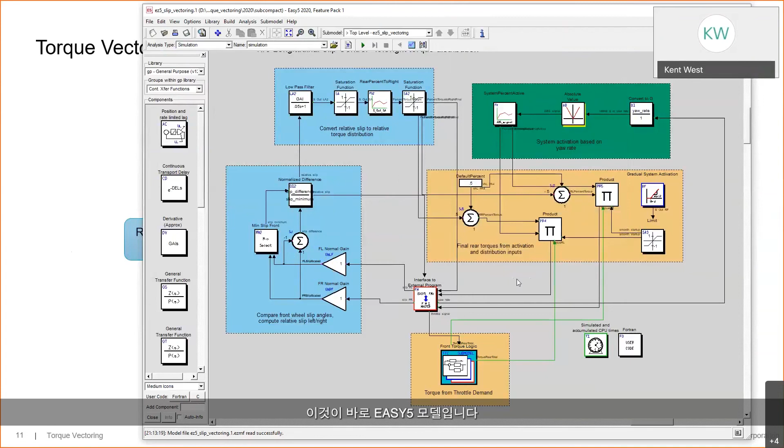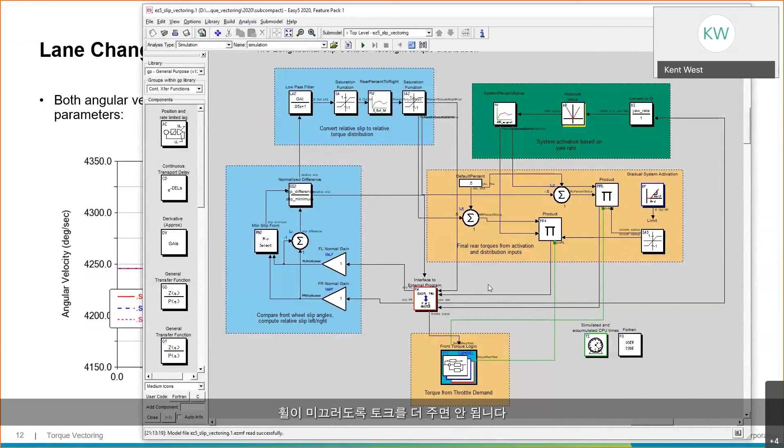What this model should have on these final torque inputs is some slip threshold—it shouldn't provide more torque once the wheel is slipping. Anyway, that's how the controller influences the model.

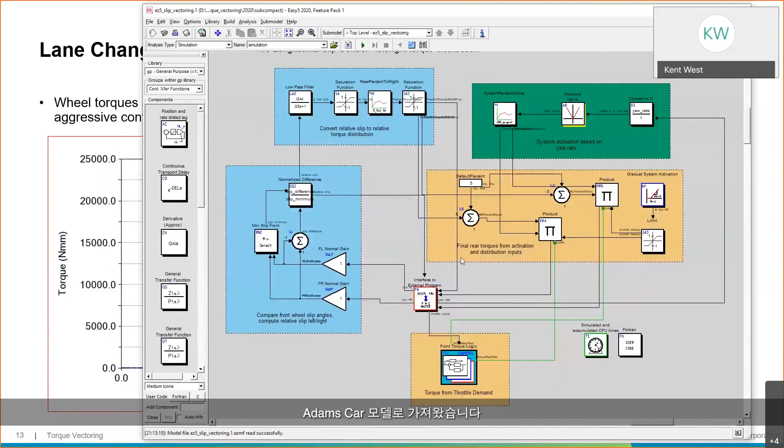In a nutshell, we've taken this Easy5 model, created it as an FMU, and brought it into this Adams Car model. Because this Adams Car model has mechatronics components, I can run the lane change events I wanted. But not only that, I could also run the Imola track that Manuel showed, or any kind of simulation I want, because with the FMU implementation, I can run any kind of simulation now in Adams Car.

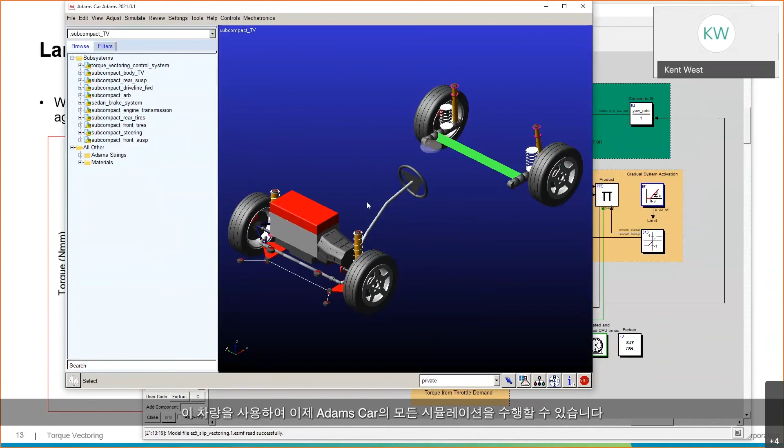So that's the overview of this section. Once again, it was implementing a simple torque vectoring system into an existing Adams Car model. Thanks.